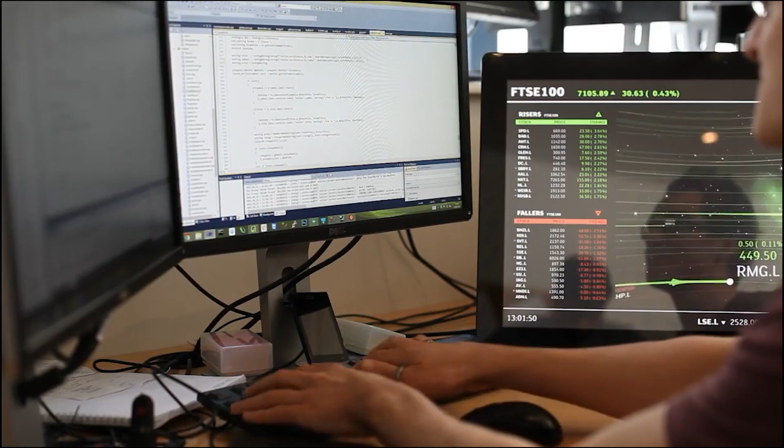London, one of the most influential cities in the world, a global financial hub, a center of culture, and a key gateway for international travel. Every day, millions of commuters, tourists, and business professionals move through the city. But transportation has always been a challenge.

The existing underground and rail networks were operating beyond capacity. Major lines, such as the Central and Jubilee lines, suffered from severe overcrowding, while east-west travel remained slow and inefficient. Long-distance commuters used to travel about 3 hours a day. A global city like London needed a faster, more efficient alternative.

Then in 2022, a new railway emerged to transform London's transport system: the Elizabeth Line. From Royal Oak in the west of London to Plumstead in the east, a total of 42 kilometers of new tunnels were constructed, connecting 41 stations.

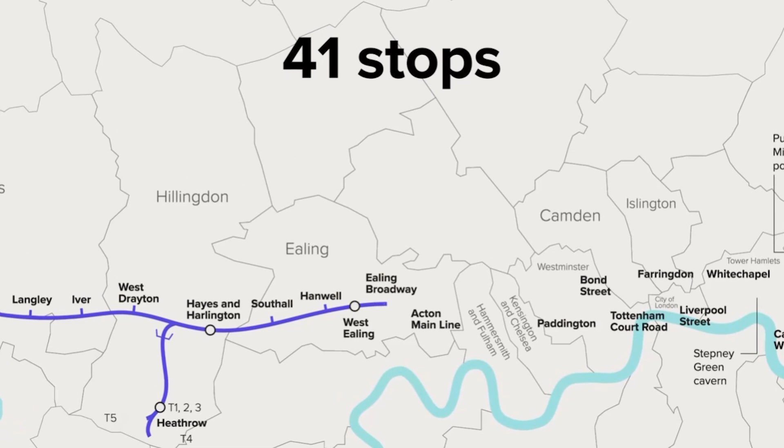At that time, there was a region that desperately needed a transportation revolution from the Elizabeth Line. And that was none other than Canary Wharf in the Docklands.

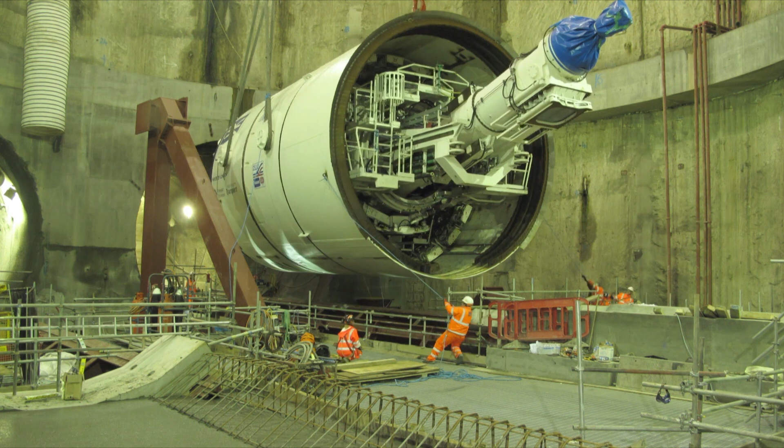The key technology that allowed the Elizabeth Line to pass through Canary Wharf was the TBM, the tunnel boring machine. There are various types of TBMs used for excavation, but the equipment used at Crossrail station was the Earth Pressure Balance TBM. This type was chosen for excavating the Canary Wharf area, which consists of soft and mixed ground, as it ensures ground stability during the tunneling process.

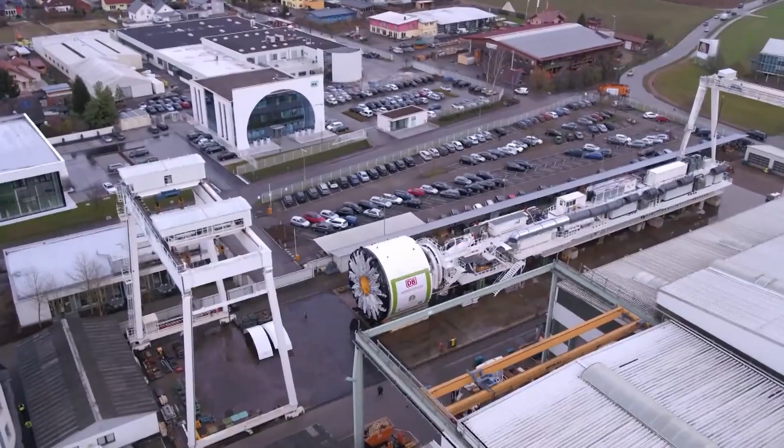TBMs are typically built to lengths of 16 to 100 meters, and in special cases even over 120 meters. As the length suggests, TBMs are specialized for straight sections, capable of excavating long, uninterrupted paths in a single drive. However, this strength becomes a limitation in highly curved sections. Navigating tight bends with such a long machine is no easy task. In these areas, sprayed concrete lining (SCL) is required.

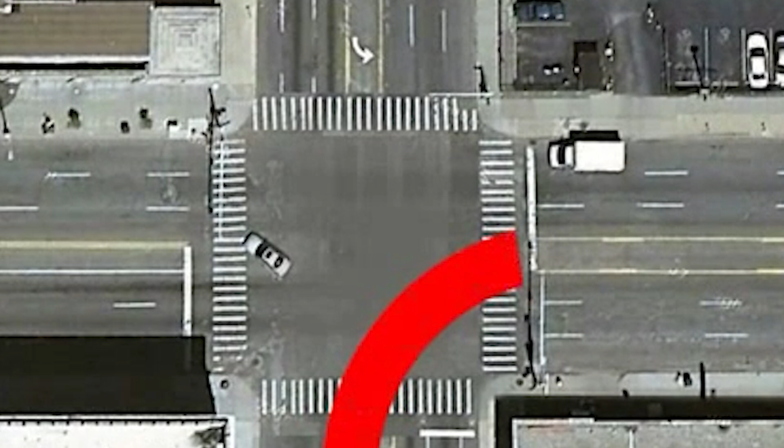Another exception is that TBMs, while specialized for straight sections, are not completely incapable of passing through curved sections. The ability of a TBM to navigate a curve depends on the radius of the curve and the size of the TBM. While TBMs are equipped with mechanisms that allow the machine to rotate in the direction of the curve, they can only pass through curves with a minimum radius of 150 to 200 meters.

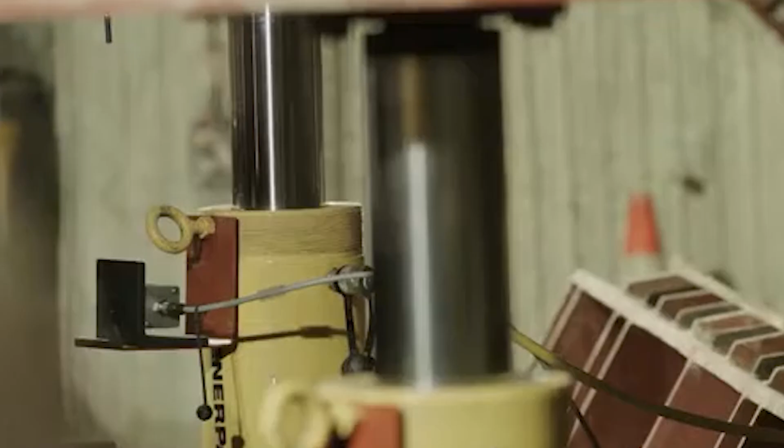In the case of London's Crossrail project, some TBMs were able to pass through the curved sections as a minimum radius of 200 meters was available, allowing the work to proceed. Once the TBM reached the station, lifting brackets and cranes were used to move it across the pre-constructed station box to the opposite side. This is how the station tunnels were excavated.

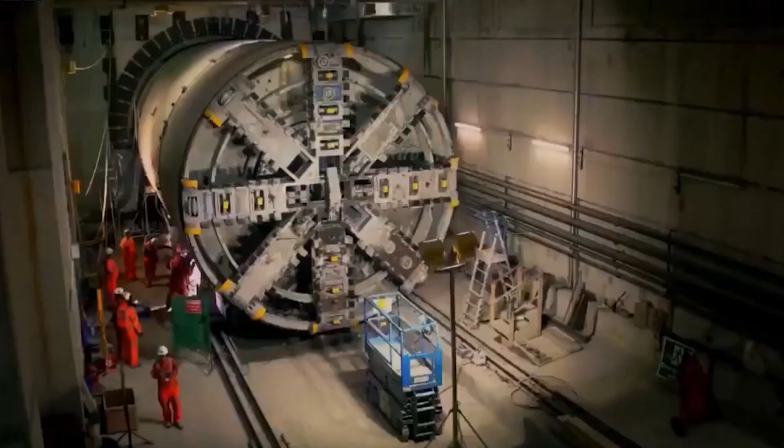Next comes the story of the station's construction. Canary Wharf Station had to be built not on land but over water due to the distribution of buildings in this area. As a result, it was constructed within the waters of the North Dock of the West India Docks, designed by Foster and Partners in collaboration with Grimshaw, the firm responsible for the overall design of the Elizabeth Line.

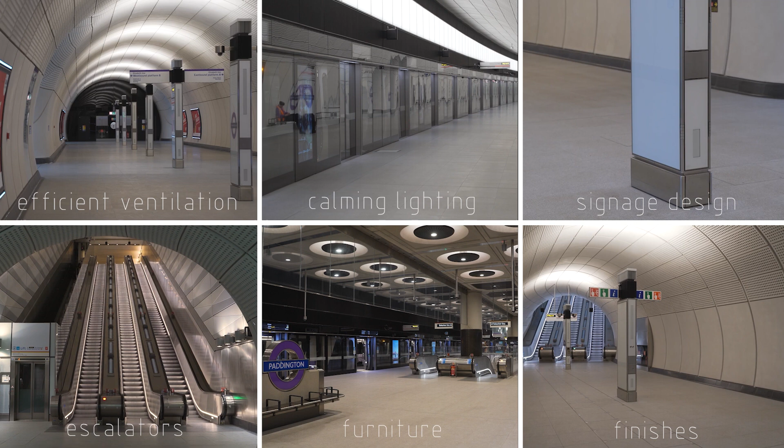Both firms focus on providing a comfortable environment for users, a quality clearly reflected in the design of the Canary Wharf Crossrail station. At that stage, connectivity was also a key consideration. On the west side of the station at ground level, level 0, the Adams Plaza Bridge serves as a connection between 1 Canada Square and Crossrail Place.

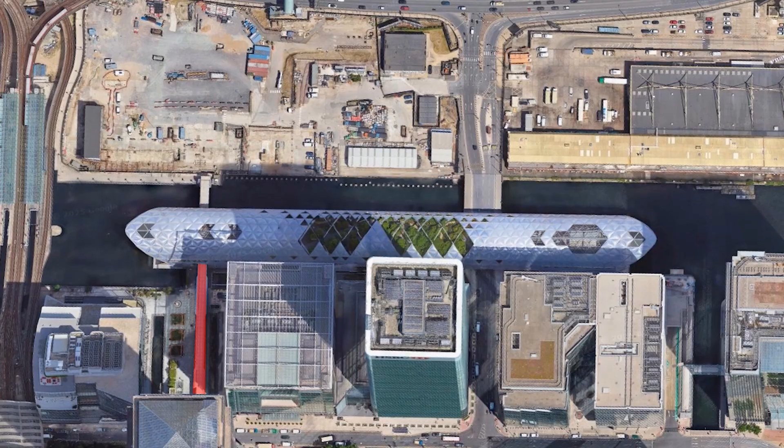Meanwhile, the bridge on the first basement level links the Poplar area with Canary Wharf. Inside the station, the tone of the finishes and the layout of openings on each level were carefully designed to create an intuitive flow for passengers, ensuring seamless spatial connections.

With the design now complete, the next step was to bring it to life through construction. However, during the construction process, unexpected challenges arose, leading to adjustments in the original design.

This building was originally designed to construct a station box over 300 meters long by reclaiming North Dock. However, considering cost and site conditions, we shortened the station box to 260 meters and chose to use a cofferdam instead of land reclamation.

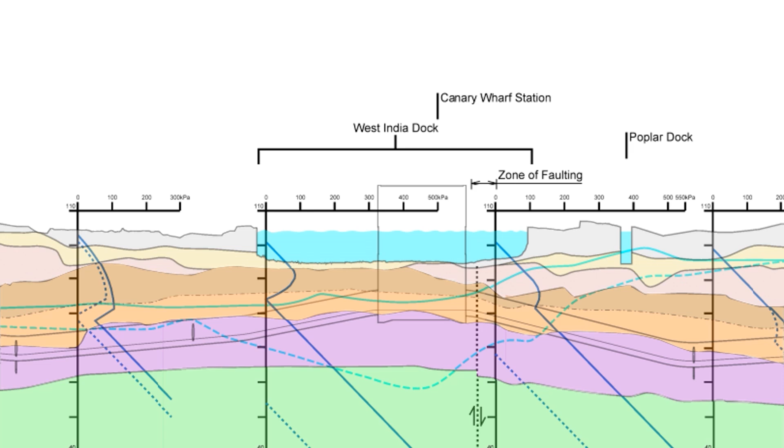Next, a geotechnical investigation was conducted to prepare for construction beneath the water. Based on the findings, site-appropriate construction methods were selected, including cofferdams, tie rods, anchors, and tubular piles. With the design and construction plans in place, the project now moved into full-scale construction.

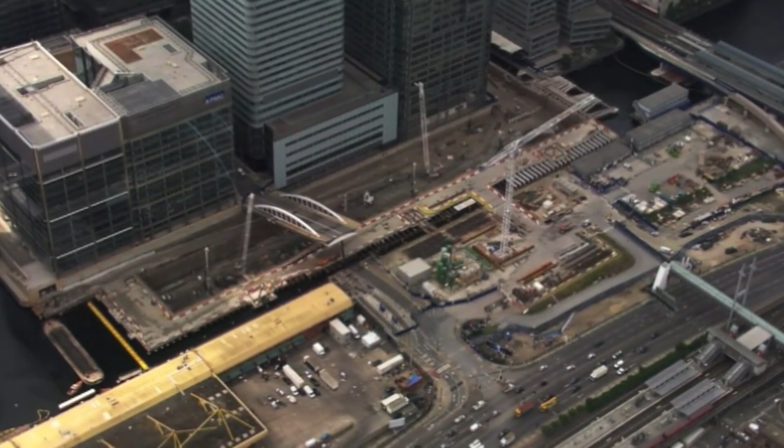We need to construct the building both above and below this dock you see here. By constructing a cofferdam here, water is temporarily blocked to create a dry working space for construction. Since water tightness was crucial, we used 18-meter long tubular piles and installed a total of 310 of them. Before driving the piles into the ground, we used the augering method for pre-boring, followed by hydraulic pressing to install them.

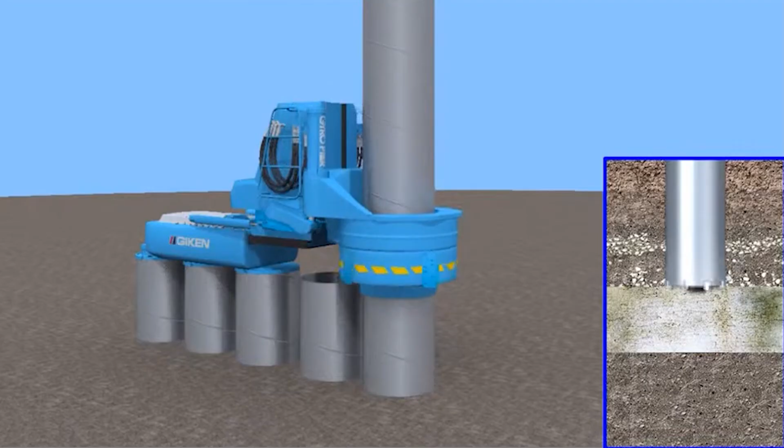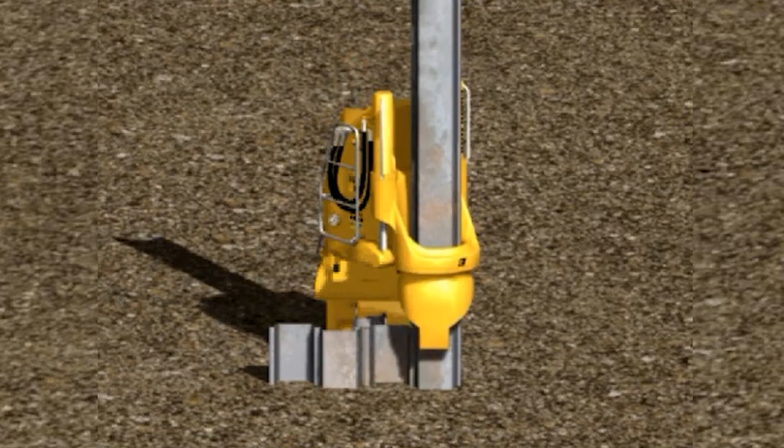We first drive 2 or 3 piles into the ground with high precision. Then, the crane lifts the silent piler main unit and mounts it onto the installed piles. From this point, the silent piler switches to self-propelled mode and continues the work by moving on its own. Since the piles need to be installed in a U-shape, the piler has to turn corners. Even then, this machine automatically changes direction and moves on its own.

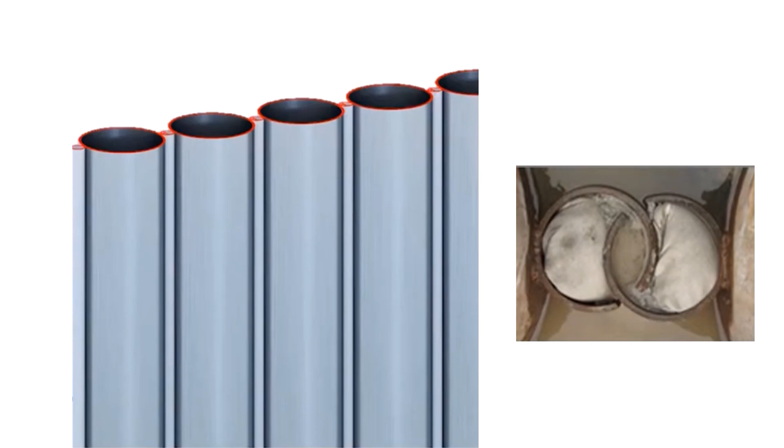As the piler drives the piles, interlock connections for water tightness are made immediately behind it. These connections link each pile to prevent water from entering the cofferdam. Additionally, to reinforce the watertight performance of the interlock joints, waterproof synthetic fiber sheets called geotextiles were inserted, and cement-based waterproof grout was injected into the gaps, completing a fully watertight cofferdam.

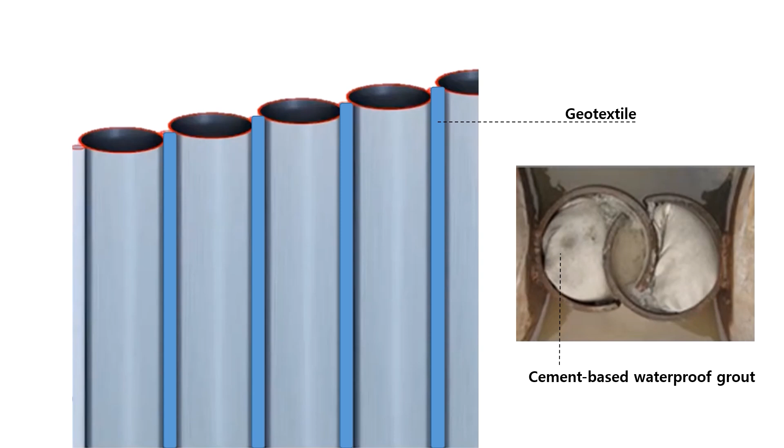This cofferdam had to withstand long-term loads as it was also used as a permanent structure. Therefore, additional reinforced concrete piles were installed inside each hollow steel pipe pile to provide internal reinforcement. After driving the steel pipe piles to a depth of 18 meters, dry drilling was performed to install the RC piles, which were then inserted as concrete-filled piles down to 36 meters below the water surface.

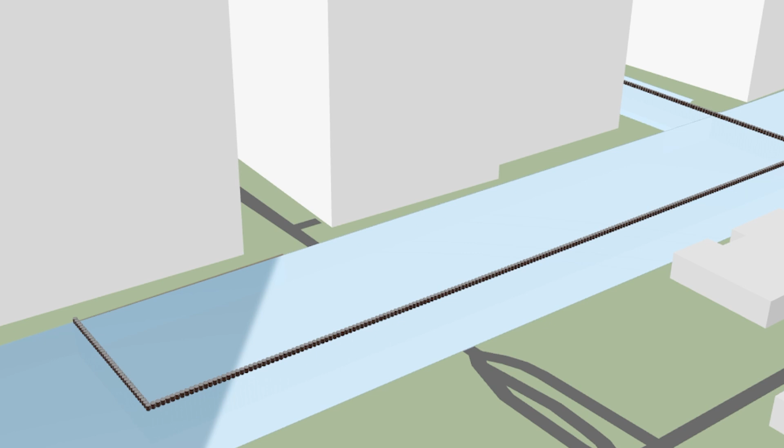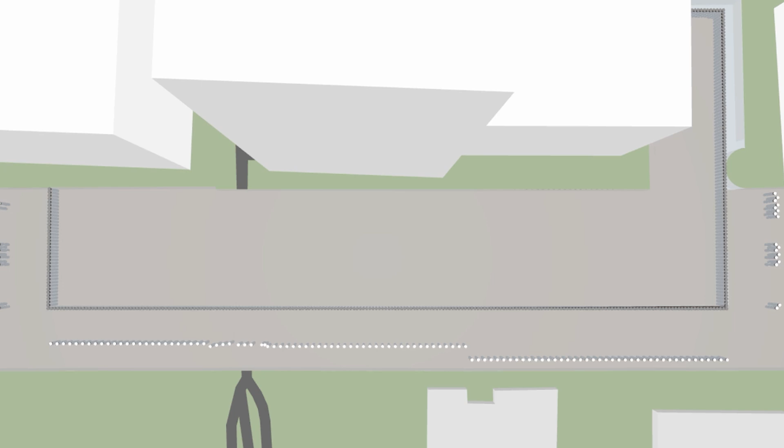Since the internal reinforcement alone was insufficient to resist external lateral loads and water pressure, anchor piles were required. These piles, having the same specifications as the steel tubular piles, were additionally installed outside the cofferdam. At this time, the east and west anchor piles could not be arranged in a straight line because they were installed to avoid the TBM's path. The anchor piles were also reinforced with deep RC piles inside them.

A total of 160 anchor piles were driven in at intervals of 2.92 meters. The installed anchor piles were connected to the cofferdam steel tubular piles with tie rods. This was to ensure that the cofferdam steel piles remained stable and did not tilt during construction.

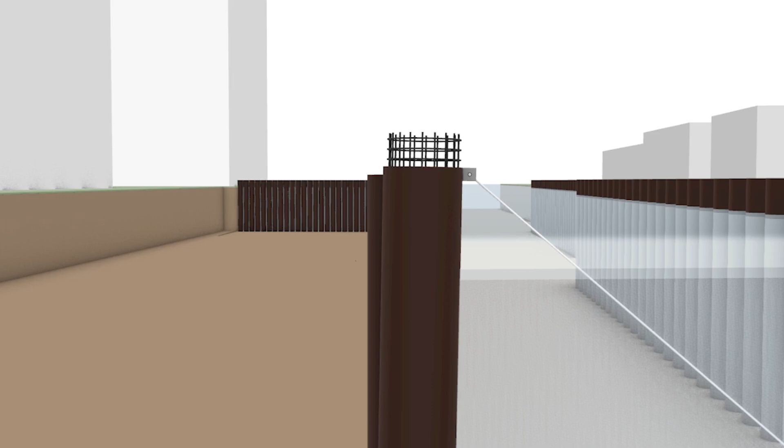Considering when the water was pumped out, hydraulic jacks were used to apply a force of about 100 kN per meter to the tight walls, anticipating inward movement. As a result, initially, the walls were pushed outward, opposite to the excavation direction. But later, during dock dewatering, they moved toward the excavation direction.

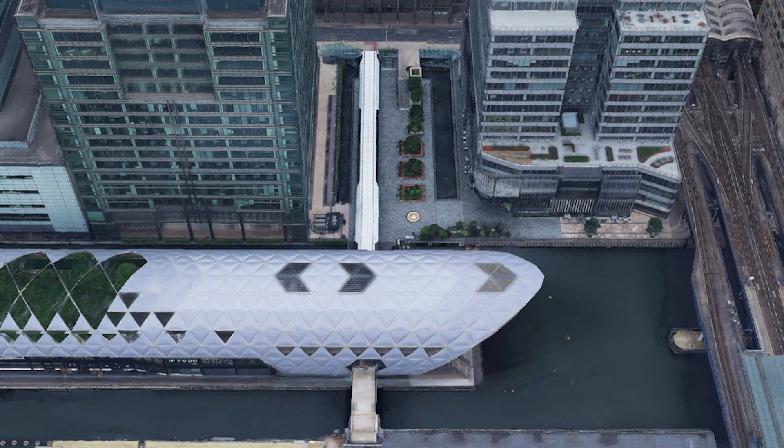It might seem that the north, east, and west walls were completed as planned, but in reality, the cofferdam was extended beyond the main boundary of the station on the west side. Historically, this area was a passage used by ships, and during redevelopment, it was intentionally left open to accommodate future transportation and infrastructure needs. When Canary Wharf's Crossrail Station was eventually built on this site, that space was repurposed as a passage, becoming a crucial pedestrian route connecting the Elizabeth Line's Canary Wharf Station with the existing Jubilee Line Canary Wharf Station. This connection was made possible through the construction of the Adams Plaza Bridge, with the central area becoming known as Adams Plaza.

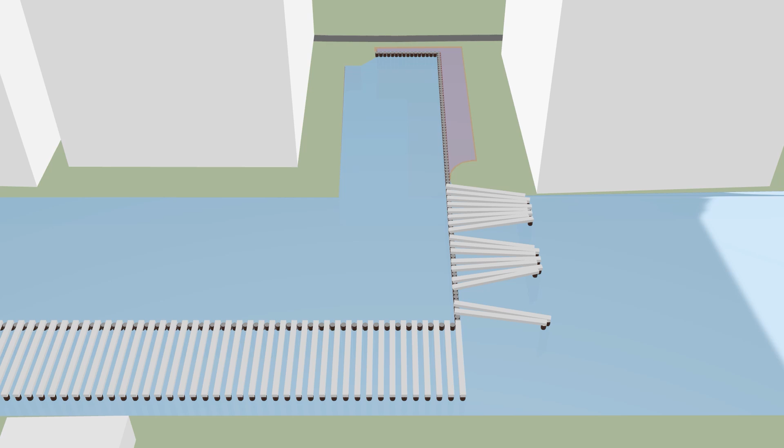To carry out construction in this extended area, a dry working space had to be secured there as well. However, there wasn't enough space in that area to install anchor piles. As a result, a tie-back retaining wall system couldn't be applied to the tubular piles. As an alternative, we installed a berm cantilever sheet pile wall.

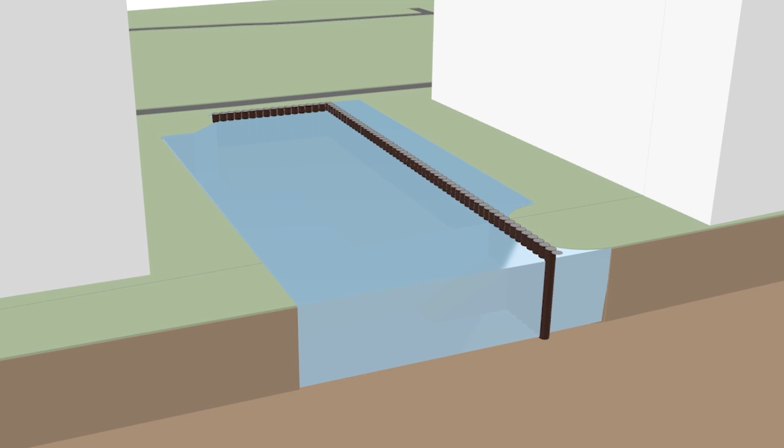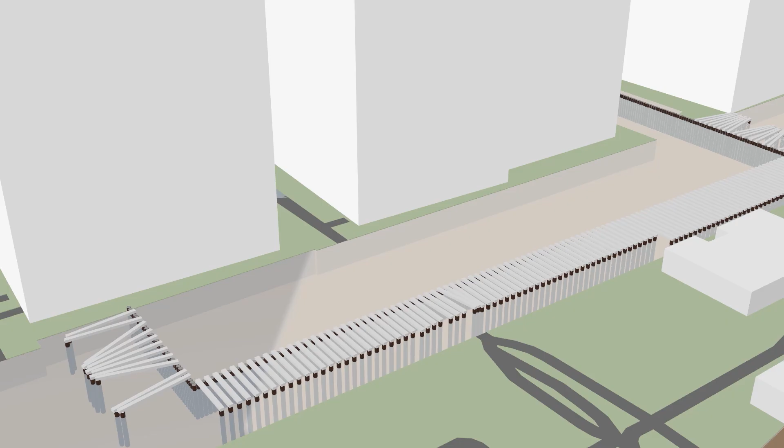This structure enhances resistance to water pressure by forming a berm, an embankment of soil or gravel behind the sheet piles. It is one of the techniques used in underwater berm construction, and in this case, materials were placed using both dumping from barges and pipe-based installation methods. In this way, the north, east, and west walls were completed. The south wall was formed using the existing structure that had been part of the original dock, thereby completing all four sides.

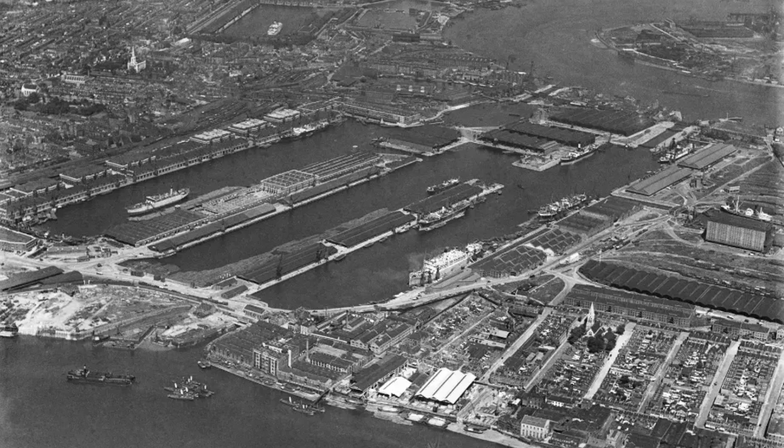This is what Canary Wharf looked like in the 1940s. This area was originally land. To create a dock, the ground was artificially excavated and water from the River Thames was brought in. Later, as the area was developed, the dock transformed into a global financial hub, with tall buildings being constructed.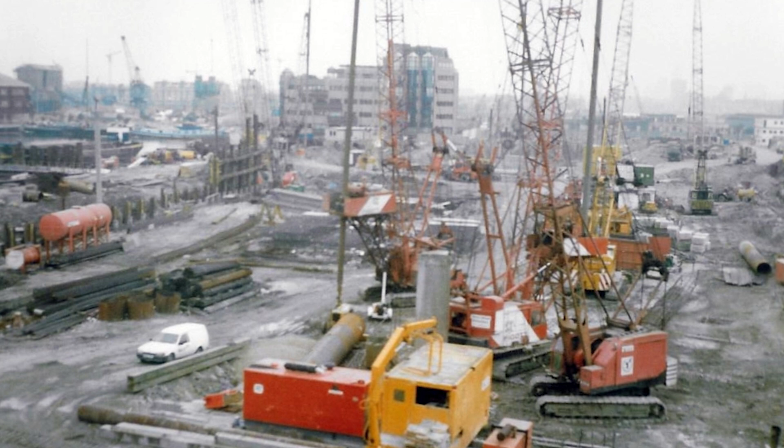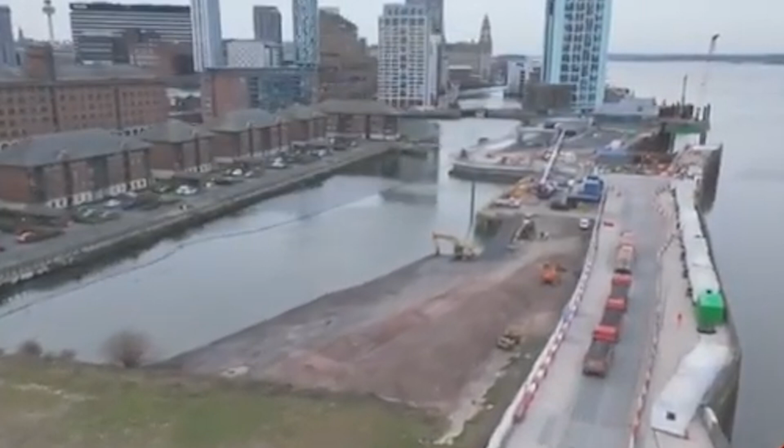To support that transformation, land that was stronger and wider than the original site was required. To expand the site, the dock infill method was applied. Depending on the required expansion range, the outer boundary is formed with sheet piles or concrete walls, and the inside is filled with soil to create a new site.

Since a high-rise building was scheduled to be built on top of this reclaimed land, a slurry wall was constructed to structurally reinforce the edges of the site. The slurry wall is a construction method that forms a deep and solid underground concrete wall.

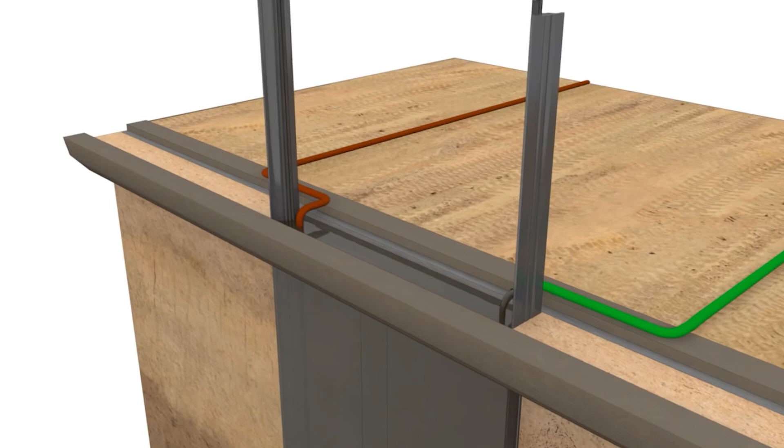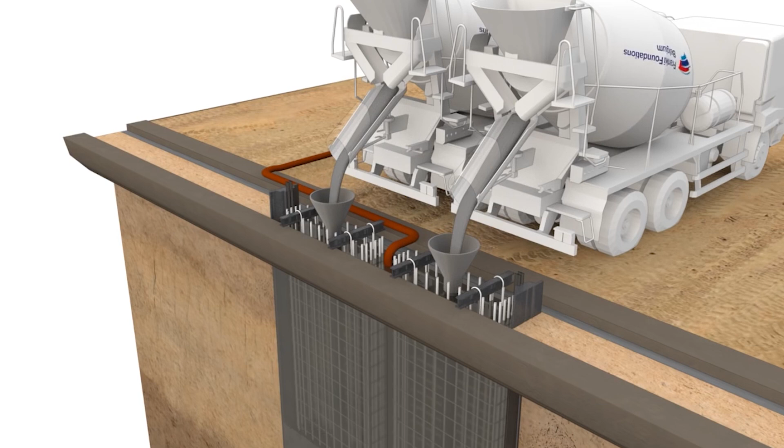First, the ground is excavated. Then, slurry is filled to prevent soil collapse. A rebar cage is inserted inside, and concrete is poured to complete the wall. Through this method, both the water blocking function and structural stability of the site's outer perimeter were secured.

Since this slurry wall was located on the south side, there was no space to install additional anchor piles or tie rods, so the wall was used as it was in the construction. Now, it's time to pump out the water trapped inside the cofferdam. After dewatering created a dry environment, it was time to lower the equipment underground for the top-down construction.

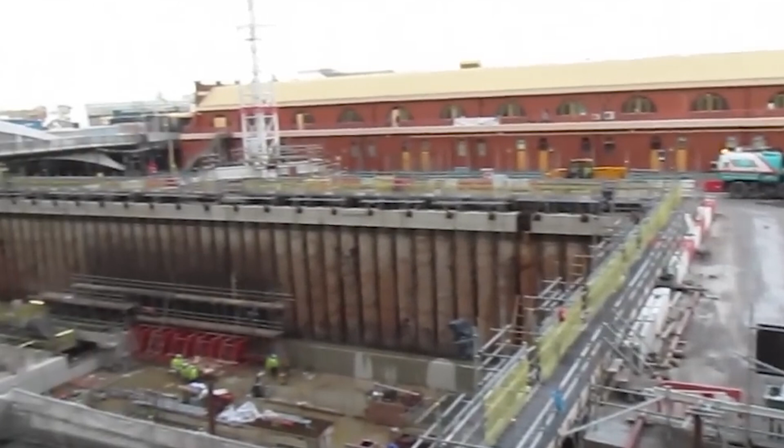A sheet pile ramp was installed, allowing equipment to be moved toward the east in the direction of the Great Wharf Road Bridge. In addition to the existing southern wall of the previous building, which served as a barrier for dewatering, an additional southern wall, a secant pile wall, was required for the construction of Canary Wharf Station.

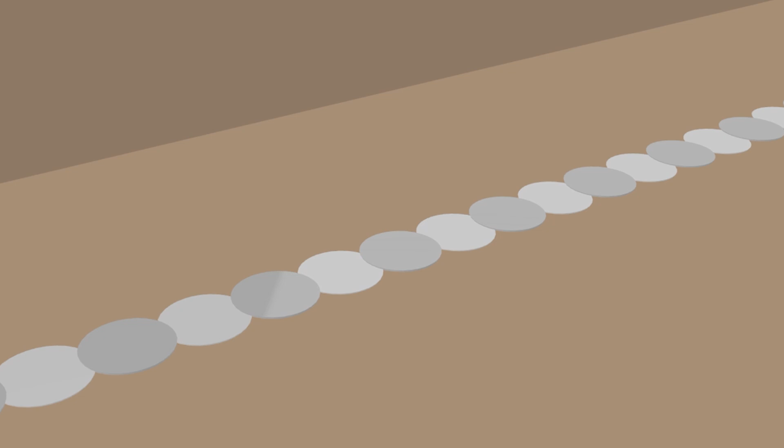First, pre-drilling is carried out using a continuous flight auger. Once the excavation is complete, secant piles are installed. Unreinforced concrete soft piles are installed first to act as an initial earth retaining wall, followed by reinforced concrete hard piles between them to ensure structural strength. This secant pile wall, constructed in this manner, supports the ground with its own rigidity, thereby securing structural stability.

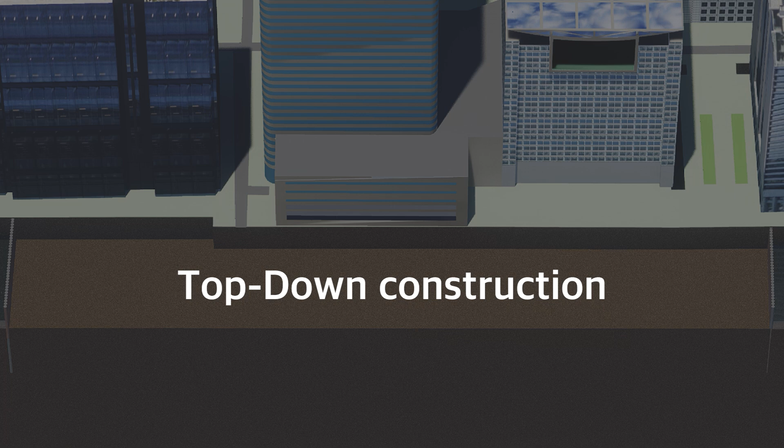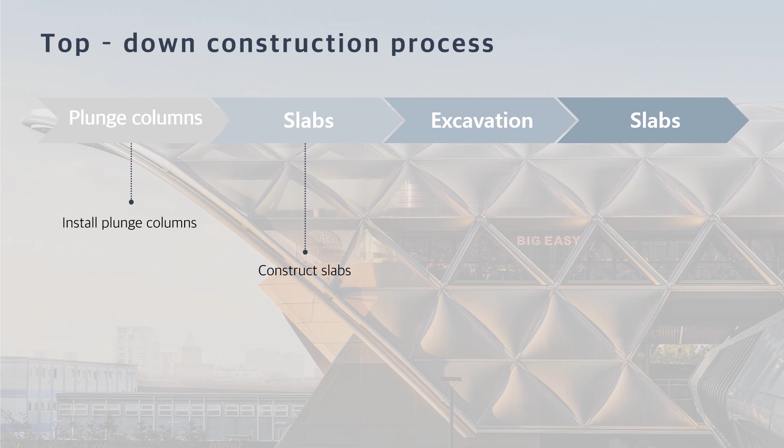Now begins the full-scale implementation of the top-down construction method. Plunge columns are driven into the locations where the building's reinforced concrete columns will eventually be placed. These plunge columns temporarily support the load of the upper slabs during the top-down process. Due to the nature of the method, where slabs are constructed from the top downward while excavation proceeds below, immediate structural support is required during each stage, and the plunge columns serve this critical role.

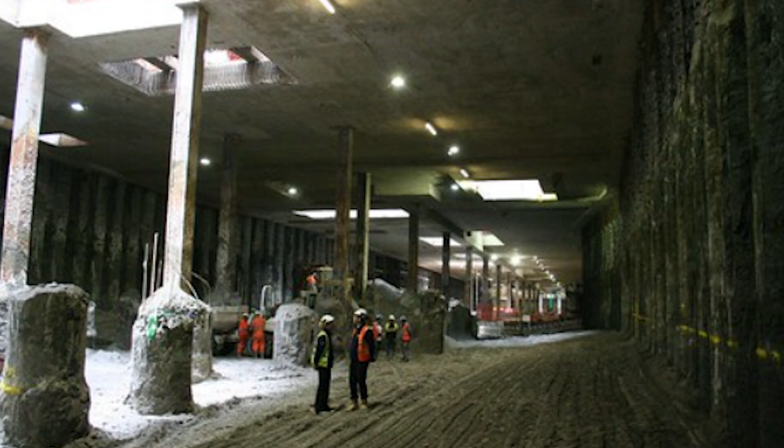A total of 30 plunge columns were installed on site, driven down to a depth of 40 meters below the surface along the building's center lines. The columns were not aligned in a perfectly straight line. At future mall hall locations, 2 columns were placed side by side at 3-meter intervals.

Once excavation is completed down to the lowest level and the permanent columns are installed, the structural role of these plunge columns is partially transferred. They are then integrated with the superstructure and used as part of the permanent structural system.

Let's take a closer look at the construction process, starting from sublevel 3, which is closest to the dock bed. First, the ground is excavated to a depth of approximately 2 meters. Then, temporary supports are installed in intervals of about 1.5 meters to support the formwork that will be placed afterward.

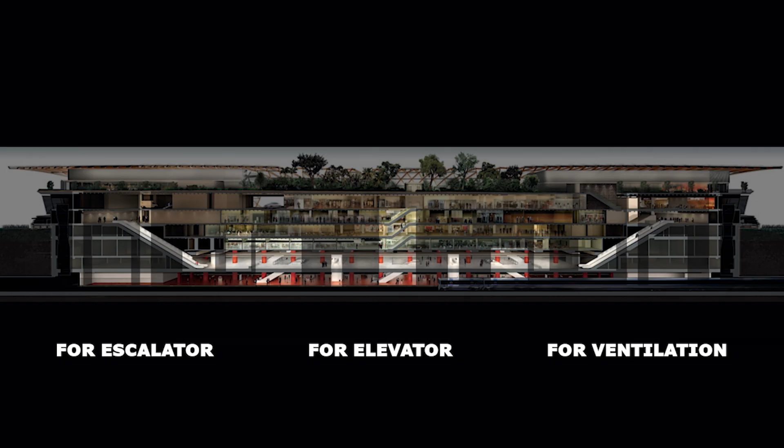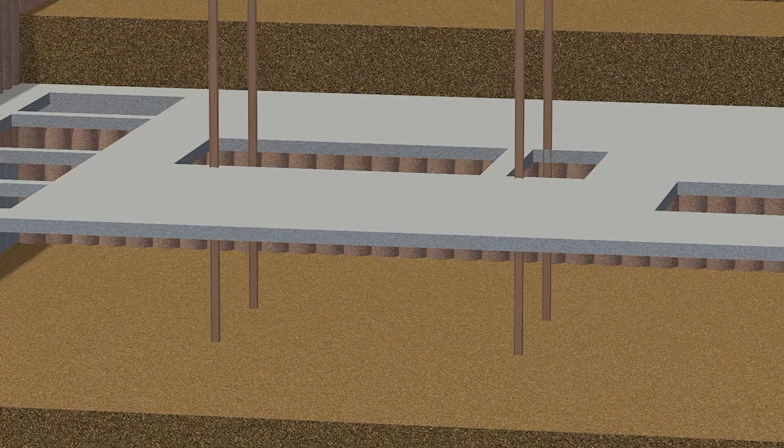In areas designated for mall halls, spaces reserved for the vertical transportation of materials and workers, as well as for future escalators and elevators, plunge columns are interrupted and cannot connect directly to the beams. To address this issue, temporary columns were installed within these areas to provide additional structural support. In addition, reinforcement beams were constructed around the mall hall openings between the piles and the plunge columns to enhance stability.

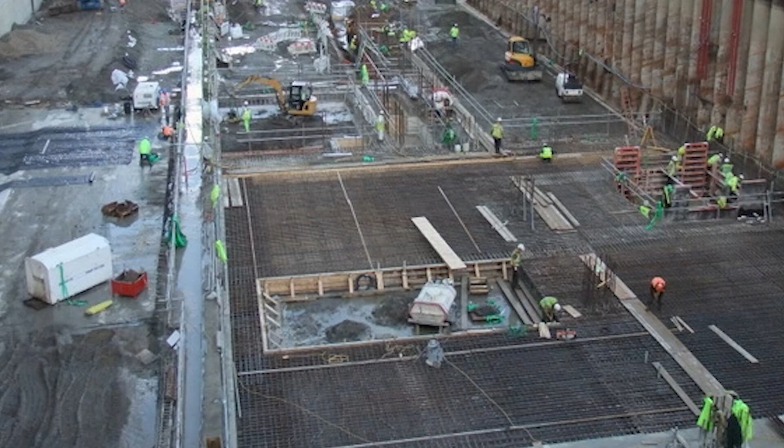On top of the formwork, reinforcement bars for the beams are placed first, followed by the reinforcement for the slab. One important point to note is that reinforcement and concrete pouring are carried out except in the mall hall areas.

At sublevel 3, a total of 23 mall halls were installed. This includes 4 ventilation shafts located at each end of the floor, 1 stair core, 1 elevator core, 1 escalator opening, and several additional openings for escalators and elevators, providing access to the retail area.

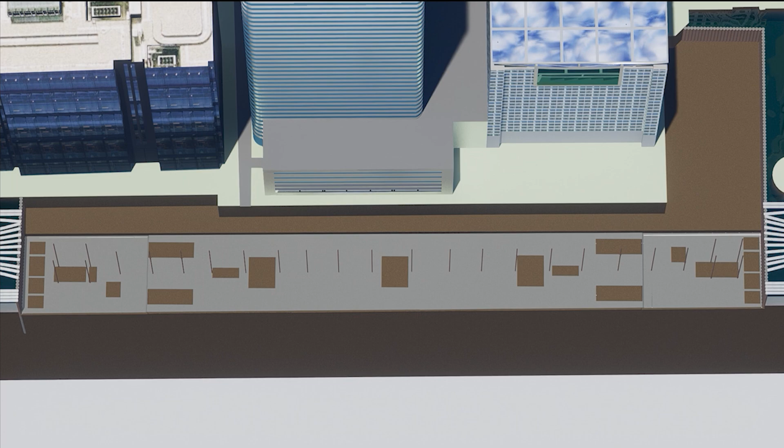For the concrete placement of the slab, the work was divided into 9 separate sections organized around the mall halls. Due to the nature of the top-down construction method, the upper slabs are built first, followed by the lower slabs.

At this stage, it was impossible for the plunge columns alone to support the upper slabs, which span up to 30 meters in width. Therefore, additional support was required to provide basic connections between the plunge columns. For this purpose, the existing secant pile wall and sheet pile wall on either side were utilized.

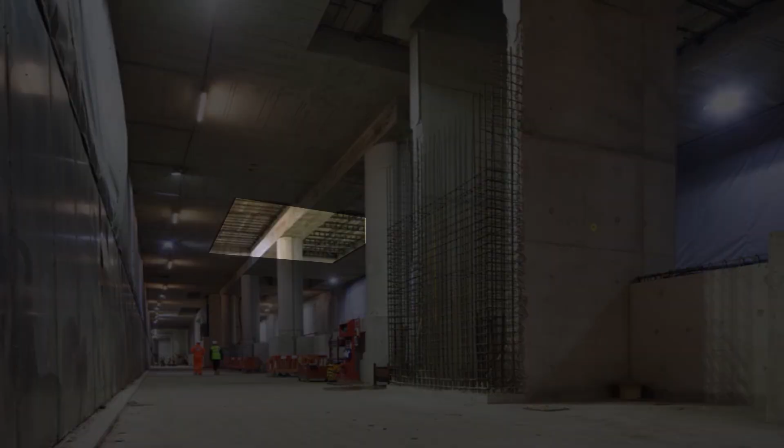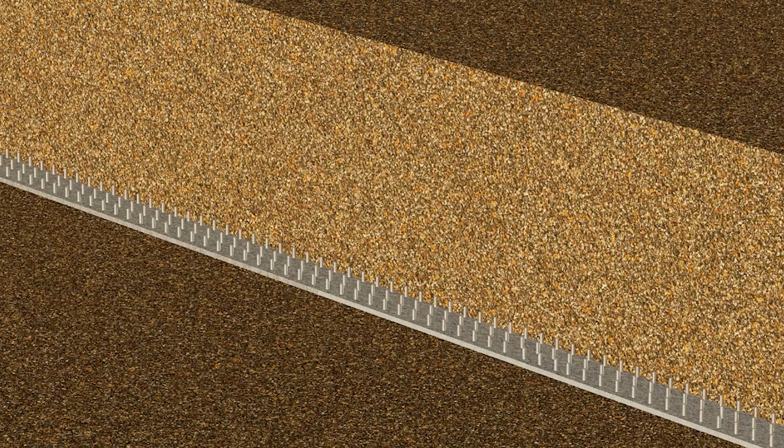During construction of the sub-level 3 slab, the secant pile wall was located below the slab level, naturally providing support at one edge of the slab. Support on the opposite edge was provided by the sheet pile wall.

Therefore, the south side supported the slab by placing it on top of the secant pile wall. However, on the east, west, and north sides, the kick-in piles protruded 9 meters higher than the slab of the sub-level 3 floor, so they could not be supported in the same way as the secant piles. At this time, the slab was supported by connecting the sub-level 3 slab and the kick-in piles through the method of slab embedded into wall socket.

Grooves were carved into the existing kick-in piles to connect the internal rebar with the rebar of the sub-level 3 slab. In this way, the kick-in piles were able to support the load of the sub-level 3 slab. Thus, a structure was created where both ends of the slab are supported by the kick-in piles and secant piles, and the center is supported by the plunge column.

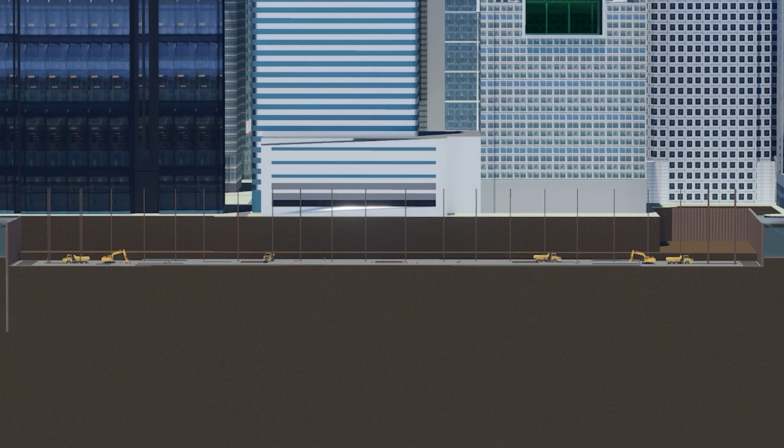The excavation for sub-level 4 was carried out simultaneously. Excavation began beneath the formwork through the mole holes. Through the mole holes, workers and materials needed for excavation were moved downward. After the excavation for sub-level 4 was completed, the process of constructing the sub-level 4 slab began, just like the sub-level 3 slab.

There were a total of 21 mole holes in sub-level 4. Rebar was placed except in those areas, and to support the slab edges, secant piles were connected on the south side and the kick-in piles on the north side.

Since both the secant piles and the kick-in piles protruded above the slab, a slab-embedded connection method was used to connect the slab rebar to the piles. After that, concrete was poured into the formwork.

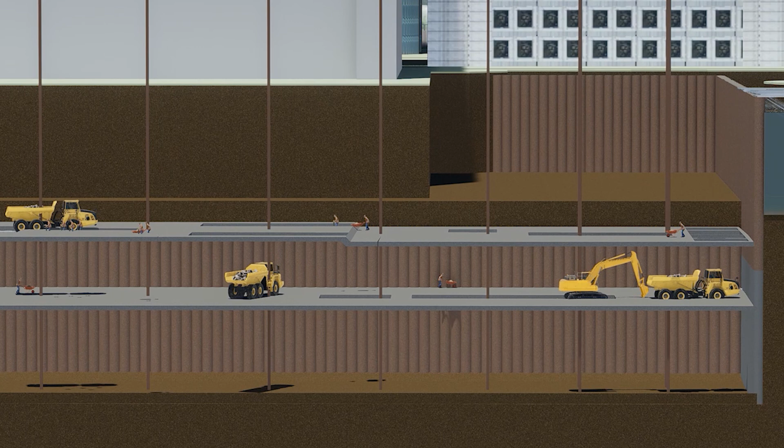After the sub-level 4 slab was completed, excavation was carried out for the sub-level 6 construction. Likewise, excavation and slab construction were carried out, while column and wall reinforcement work continued on sub-level 4 and 3 to effectively shorten the construction period.

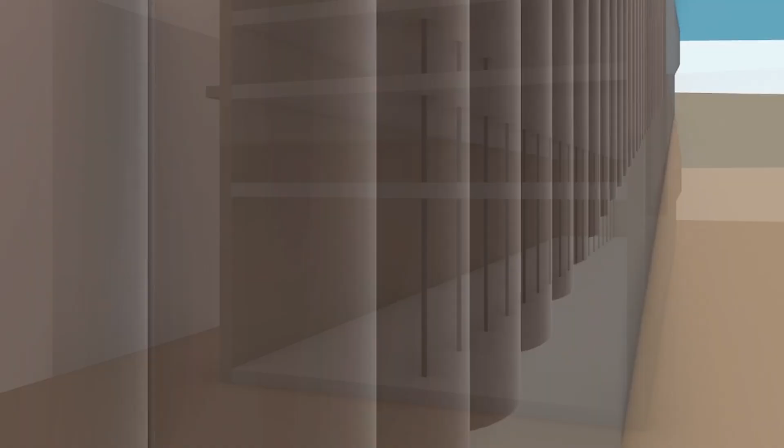It is important to note that sub-level 6 was constructed before sub-level 5. The subway runs at the lowest level of the station, sub-level 6, so the TBM also had to pass through sub-level 6. The diameter of the TBM used in the Crossrail project was 7.1 meters.

If sub-level 5 was constructed first, the TBM would either have to break through that level while passing or might not be able to enter at all. Therefore, instead of building sub-level 5 first, sub-level 6 was constructed to secure space for the TBM.

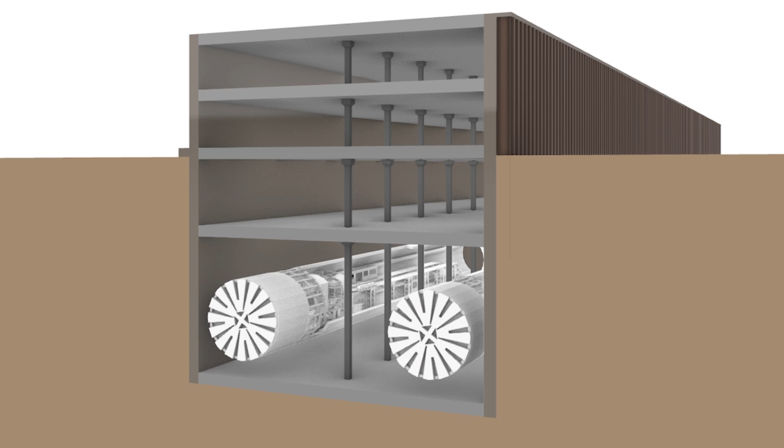In addition, unlike other floors, the slab at sublevel 6, which is the deepest part of the Canary Wharf station, has slopes at both ends. Since earth pressure and water pressure act horizontally in the underground, the slab was sloped to disperse these forces.

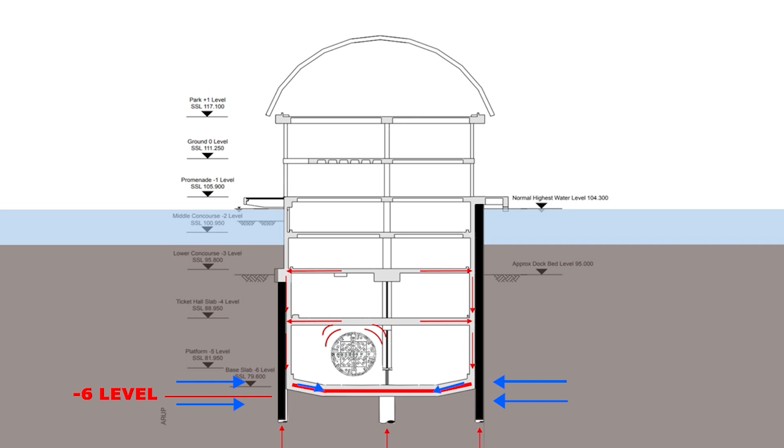After the TBM passed and the construction of sublevel 5 was completed, all the slabs of our station were constructed. In the middle of this process, to form the wall, SCL, which means sprayed concrete lined, was applied by spraying concrete along the excavation surface. Simply put, it is a method of forming a wall by installing a reinforcement mesh on the excavation surface and then spraying concrete.

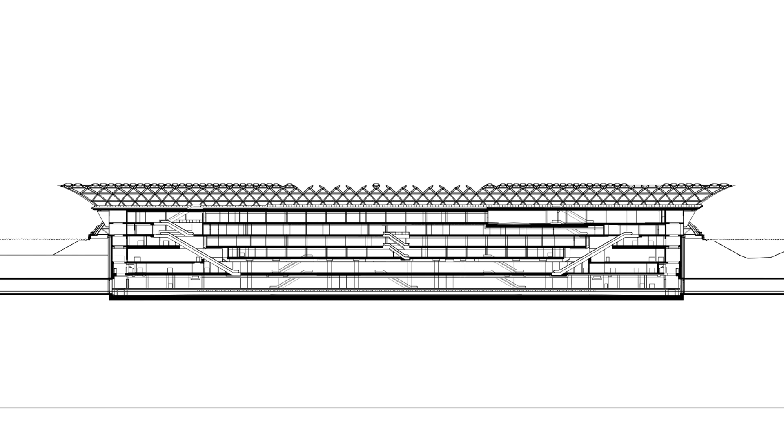This is a cross-section of the building, and let's look at the slab. We can find out that the thickness varies depending on the section. The slab on the east side of sublevel 4 is relatively thinner. This is related to the TBM entry.

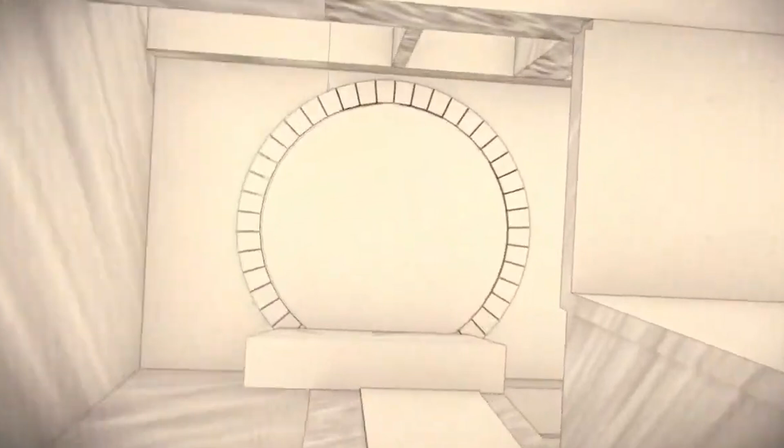During TBM operation, cumulative error can occur. The error can reach several tens to hundreds of millimeters. Considering that, the slab thickness was reduced to secure a wider passage for the TBM. Also, the slabs at both ends of sublevel 3 are lower than the center.

This is to secure a higher floor height, as the space behind the escalators on both sides houses the MEP plant. In this area, air handling units, FCUs, electrical panels, pumps, and tanks are installed. To support the weight of the equipment and for soundproofing design, a thick slab was applied.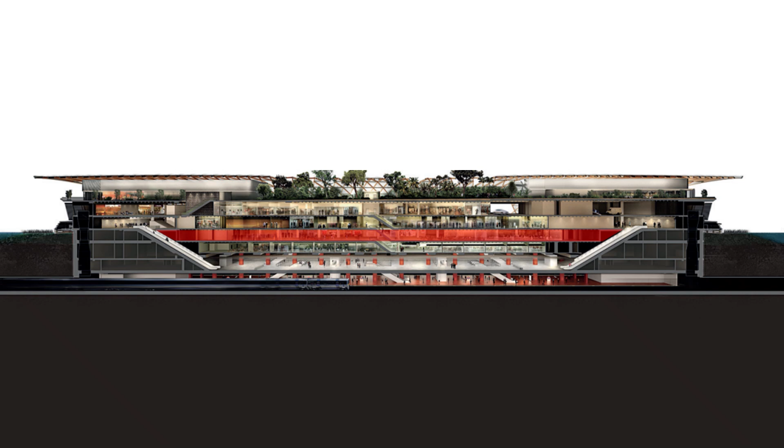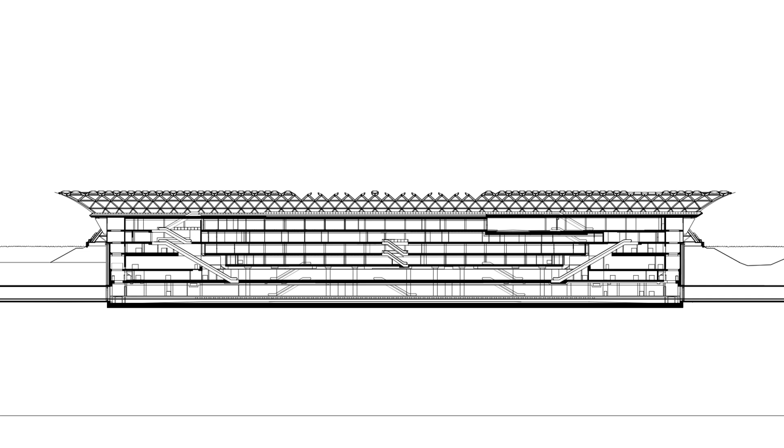In the center of sublevel 2, there are retail shops, and at both ends, there are spaces to manage them. Due to the high live load acting on the shops, precast beams and planks were used for reinforcement. Columns were installed and precast beams were placed between them, followed by precast planks installed on top of the beams. The slab on the east side of level 0 was made thicker.

At this location, there is a bridge for vehicle traffic, and the dynamic impact load from that acts much greater than the static load. In addition, since the vehicle load is directly transferred to the lower slab, the lower slab must have higher resistance to bending, shear, and deflection than a normal slab.

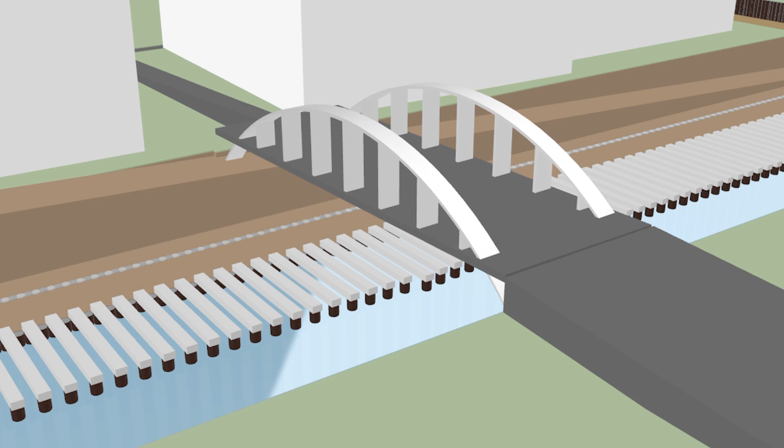At the location of the vehicle traffic bridge, which is the reason why the level 0 slab was made thicker, there originally existed the Great Wharf Road Bridge. This was the lifting bridge with a length of 68 meters, width of 24 meters, and a height of 10 meters, and it could be lifted up to a maximum of 18 meters to allow ship passage.

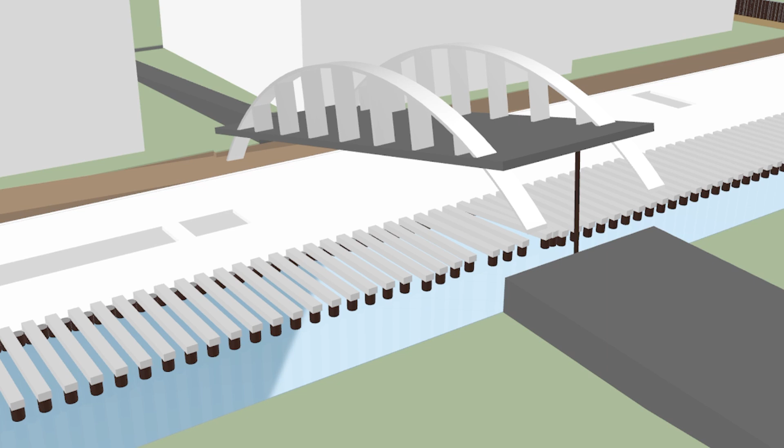During the construction process of the Crossrail station box, the bridge was actually lifted to its maximum height of 18 meters to facilitate construction. However, during the construction of level 0, it overlapped with the existing bridge, making demolition unavoidable. Accordingly, the existing bridge was completely demolished, and later, a new lifting bridge called the New Upper Bank Street Lifting Bridge was installed. This bridge, which allows vehicle traffic, connects the north wall of Canary Wharf Station to North Quay, and it is 26 meters wide and 22 meters long.

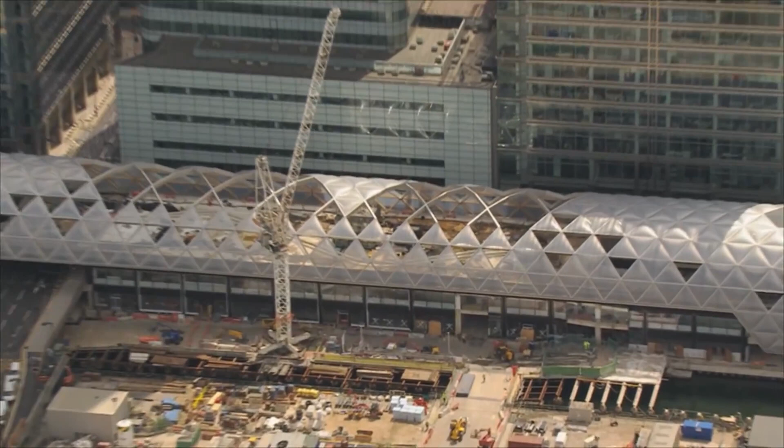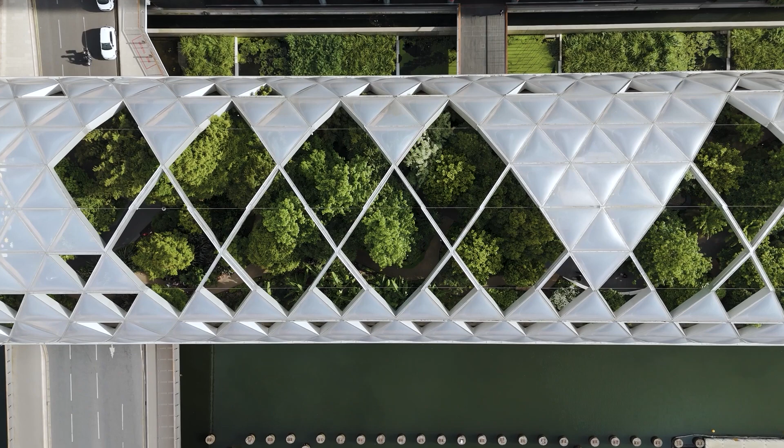We have covered the exterior and interior of the building, as well as the bridge. Now, what remains is the roof located at the top of our station. The most prominent architectural feature of Canary Wharf Station is its roof structure and rooftop garden.

The Crossrail Place roof at Canary Wharf spans 310 meters in length, with each end cantilevering 13 meters over the surface of the north dock. The roof construction of Canary Wharf Station involved the use of 1418 glulam beams and 564 steel connectors.

This roof is constructed in a diagrid form. The term diagrid is a combination of diagonal and grid, describing a structural system that maximizes stability and load distribution through a network of diagonal lattice members. By distributing loads diagonally, the diagrid system can support the structure without relying on conventional vertical columns, enabling more open and flexible architectural designs.

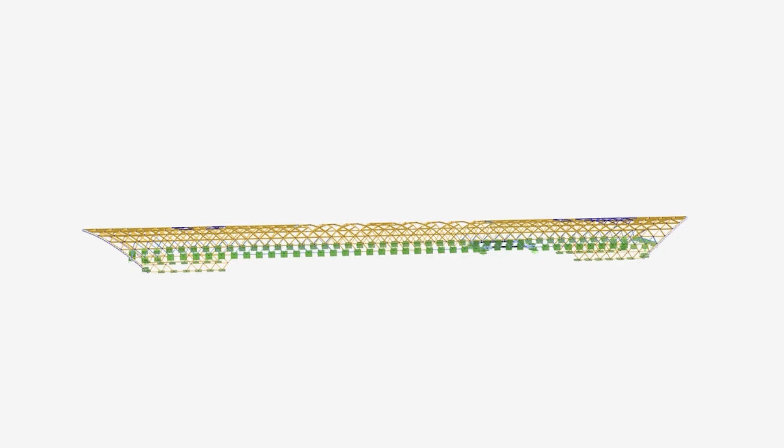The roof structure was designed using algorithm-based parametric modeling, making the lattice, beams, and connectors all asymmetrical and non-repetitive. Each component was prefabricated and assembled on site.

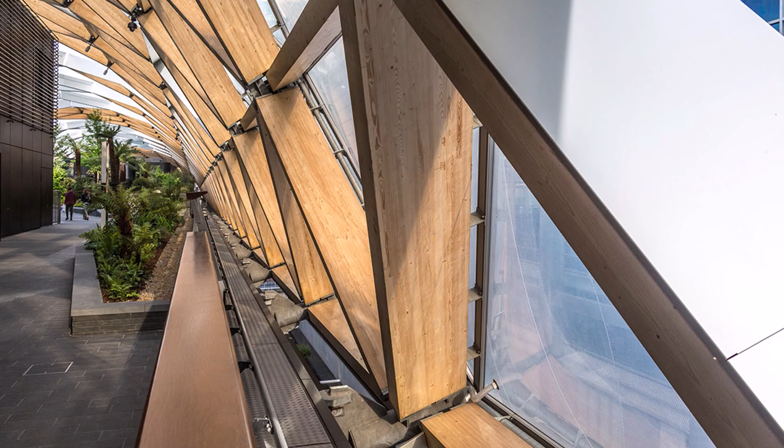Timber beams in ETFE were connected at nodes with air pipes in between to control air volume according to wind pressure, keeping the ETFE shape consistent. Temporary steel supports were used during construction to support the roof.

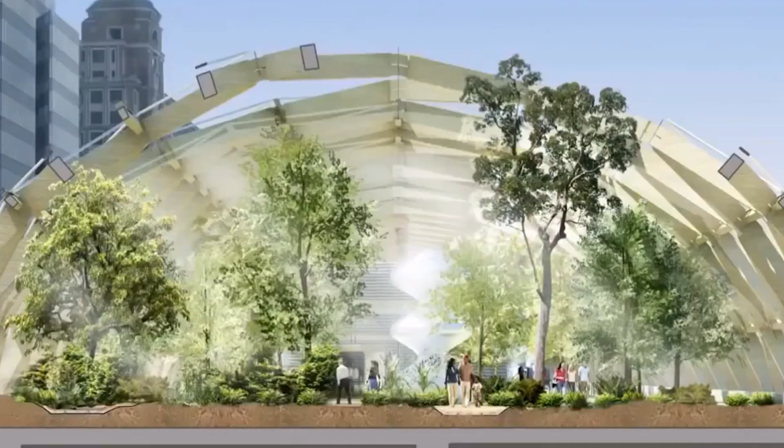A rooftop garden was created below the roof, and to support the soil, the slab was made thicker than on other floors, resulting in a higher load.

The building's east end could not have columns due to the New Upper Bank Street Lifting Bridge, so steel with higher tensile strength was used. This steel is more flexible than concrete, and adding soil and trees after the roof construction could cause it to bend under extra load.

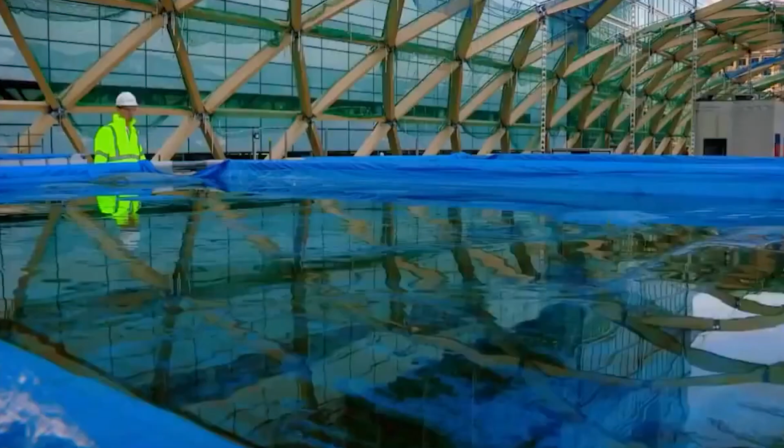To prevent this deflection, the garden load was simulated, and a water tank was installed on top to apply a pre-stress of 300 tons. Through this, it was possible to respond to deflection even when soil and trees were added.

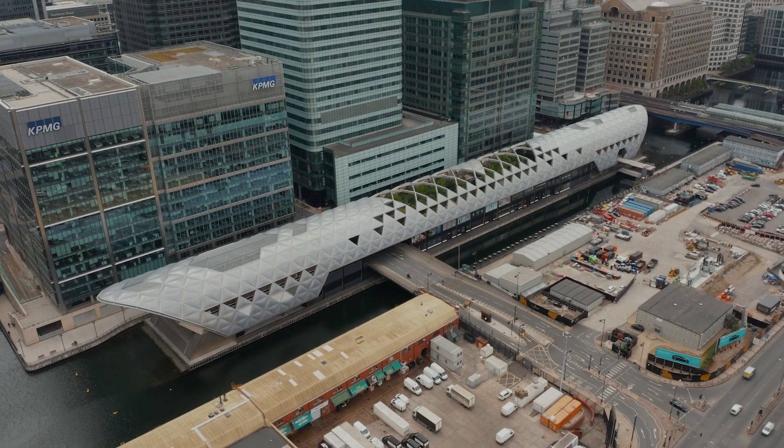The construction of Canary Wharf Station has now been completed. As part of the Elizabeth Line, Europe's largest infrastructure project, Canary Wharf Crossrail Station faced various issues including financial, contractual, and construction errors, causing delays. It was completed 13 years after groundbreaking. During this period, construction costs overran from £14.8 billion to £18.8 billion.

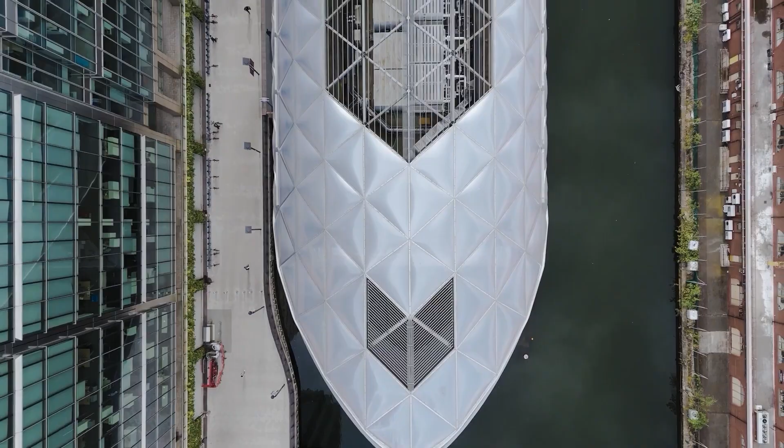Overcoming this, Canary Wharf Station has been recognized for its contributions to London's infrastructure, innovative design, and urban regeneration, earning several awards and steadily solidifying its position.